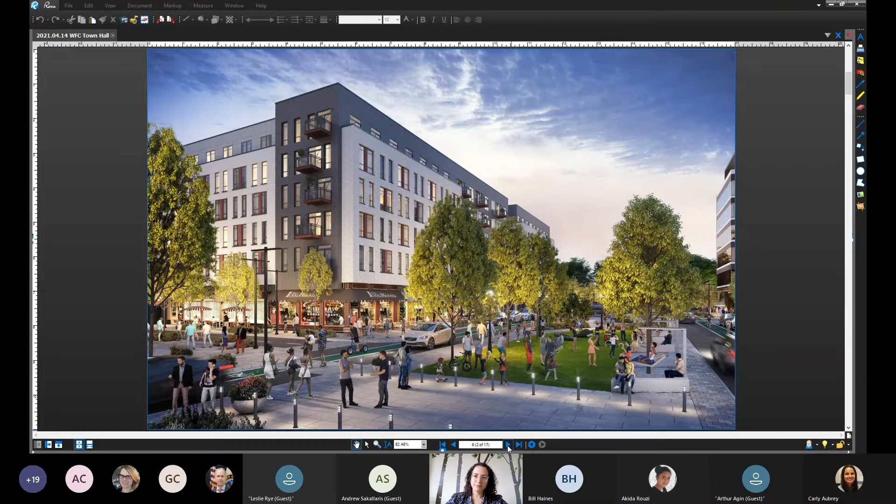Now we have turned around and the apartment is to our back, and now we're looking at the extended stay hotel next to the condo building, and then the school is behind what we're looking at right now. So again, you see that first floor retail activity is all the way around the commons.

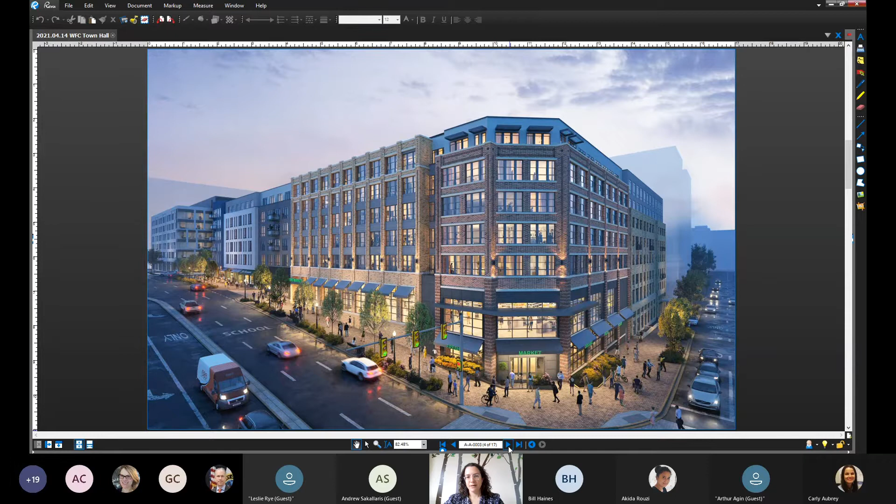And now we're standing, well, we're kind of standing high up in the air that you would never actually stand this high, but we are looking at Route 7 to our left and Haycock to our right, and we're looking at the main entry to the grocer, which is again at the first floor of the apartment building. And you can kind of see that the grocer is 2 floors at this point and kind of goes up to being 1 floor as you turn into the commons, and that's because of the 27-foot grade difference between the corner of Haycock and 7 and where the commons portion of the project starts.

So hopefully this gives a little bit of life to what we're talking about. Now back to a more technical drawing. One of the pieces that we have been working on is how to get people in and out of the commons. So right now we are looking at this stoplight is going to be added. We've been working with not only Falls Church, but Fairfax County, DOT, and VDOT to have a stoplight so that people can turn in and out of commons.

But then, as you can see here, commons is at the center. We're looking at Route 7, thinking about across the street where Chestnut Street goes through. There's a lot of concern from Fairfax County about calming traffic and not having Chestnut be a cut through. And then also we wanted to make sure that the owners on that side of the street also want to make sure that they have access to this stoplight, but we needed to kind of create a straight intersection instead of a very diagonal intersection. That wouldn't really work. So through a lot of different discussions, we came up with this plan where you're seeing these green portions added.

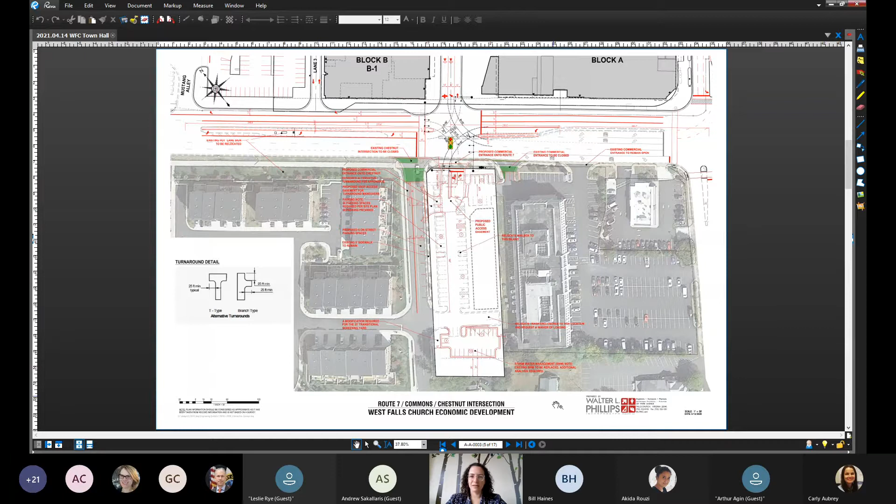So Chestnut will actually end. You won't drive through straight from Chestnut to 7 as you do now. We're creating a path through the parking lot where you turn and then turn up to be able to go to the stoplight, which will also calm traffic and probably limit the amount of people cutting through Chestnut because it's a little bit more complicated now, but also give both sides of Route 7 left-in, left-out access from a stoplight. So we're excited that we've been able to come up with this plan to make this additional ease of movement in the area.

Next page, please. So I put in this diagram because at a lot of these meetings, questions have come up about circulation on the site, and we can go into this in more detail when we get to the Q&A period.

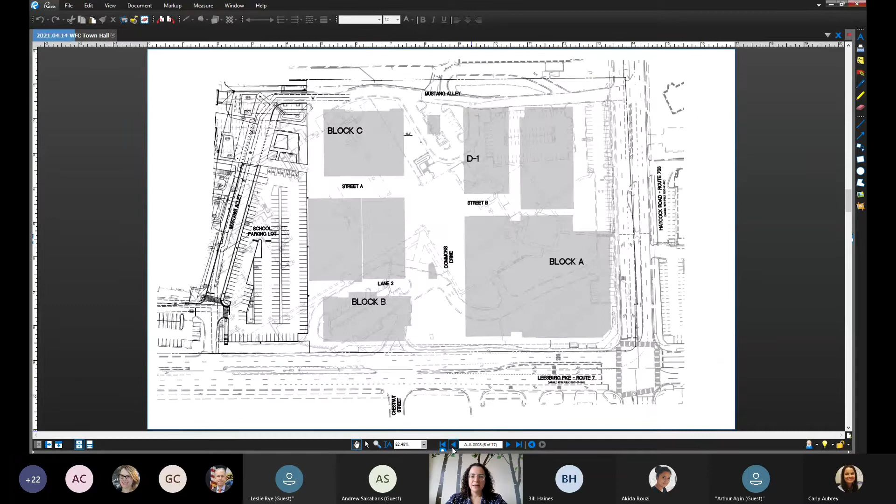So one of the questions that has come up - actually, sorry, can you go back one? Carly, thanks. So one of the questions that has come up is a lot of students are coming from the federal site or that part of the city and crossing over, and how they're going to get from one side of Haycock to the school on the other side. So we have created a stoplight where Carly has the little hand - we'll be putting a stoplight in that connects you to the street to come into the site. But then the question of that 27-foot grade exists here too, so we didn't want to have a really steep street that wasn't really accessible or comfortable to use.

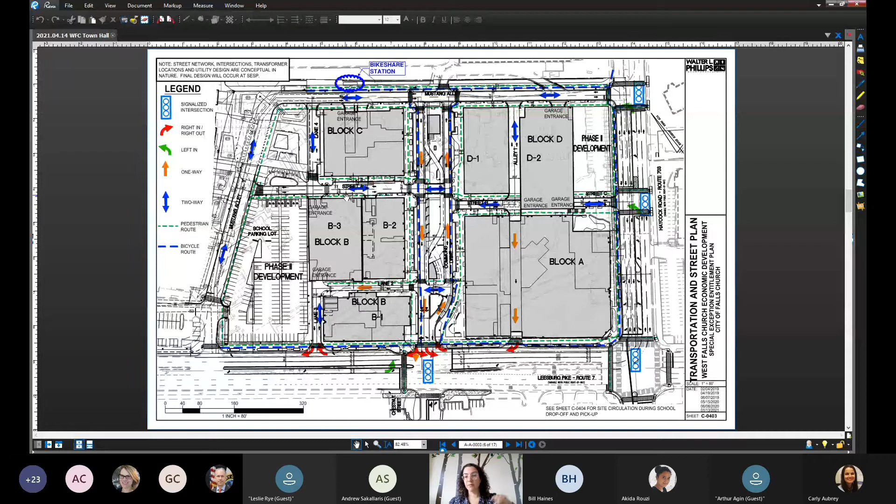So we actually have created a grand staircase with an elevator that we're going to show on the next page. It's really sweeping you in and getting you to come up, and then you get to the level of the commons and walk across and enter into the commons, and then you can keep going to the high school. So if you go to the next slide.

You come up the stairs, and at the same point basically where the stairs are, there's also going to be an elevator, because we want to make sure the experience is good no matter how you're getting upstairs - if you are in a wheelchair, if you have a stroller, if you have a bike that you don't want to bring up the stairs.

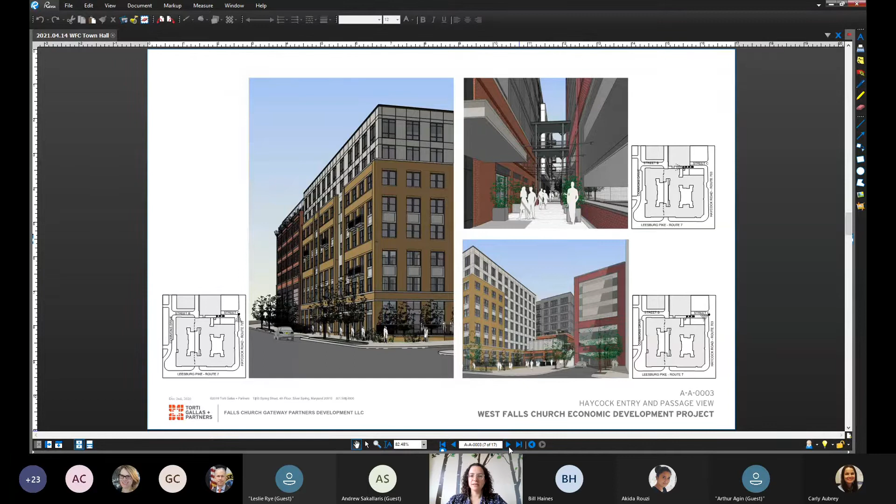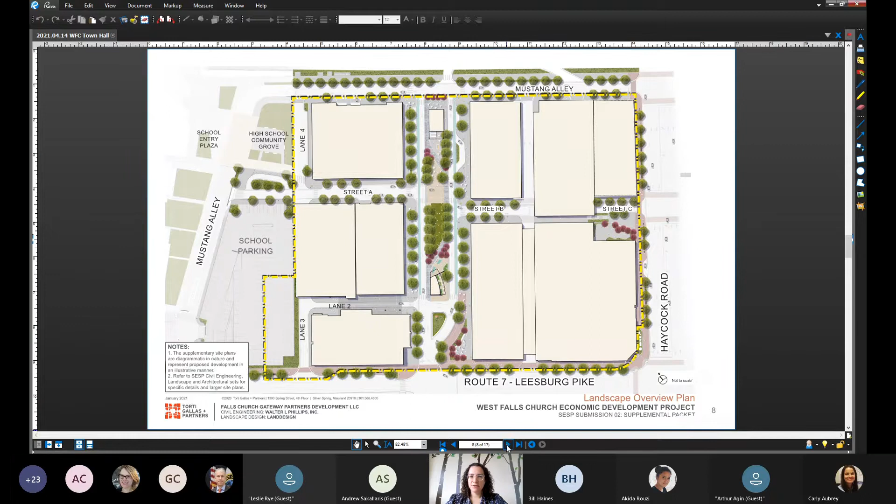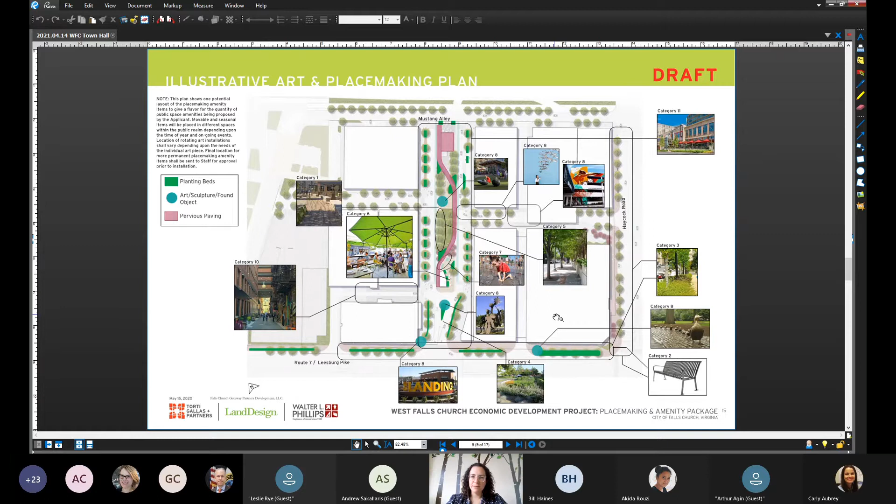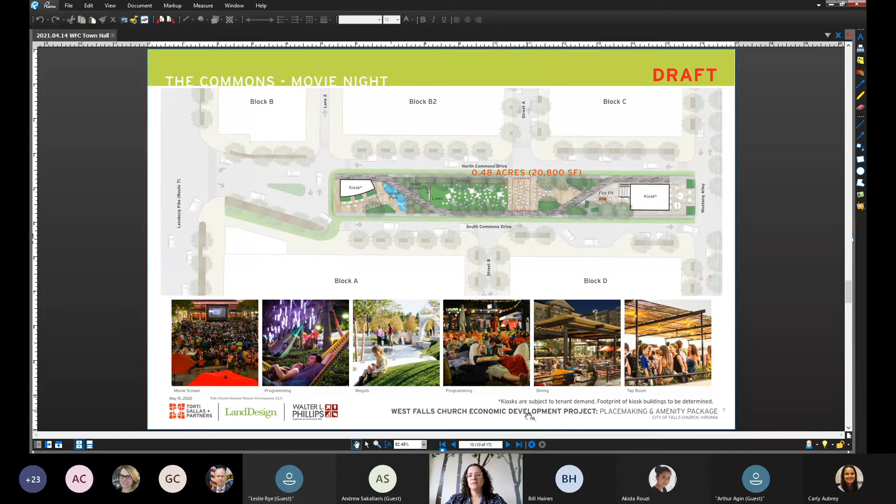Next page. And then, when I was talking about possibly closing down one or two of the center streets that surround the Commons to allow for larger events, we have a couple of examples here of something like a movie night, where you close down just that center part of the Commons, right under where it says acres. That street would get closed so that you have this one big Commons, with a splash pad, open lawn where you'd show a movie, fire pits, and different areas throughout the Commons that could come together as one. You're seeing examples of similar projects as precedents of what that would look and feel like.

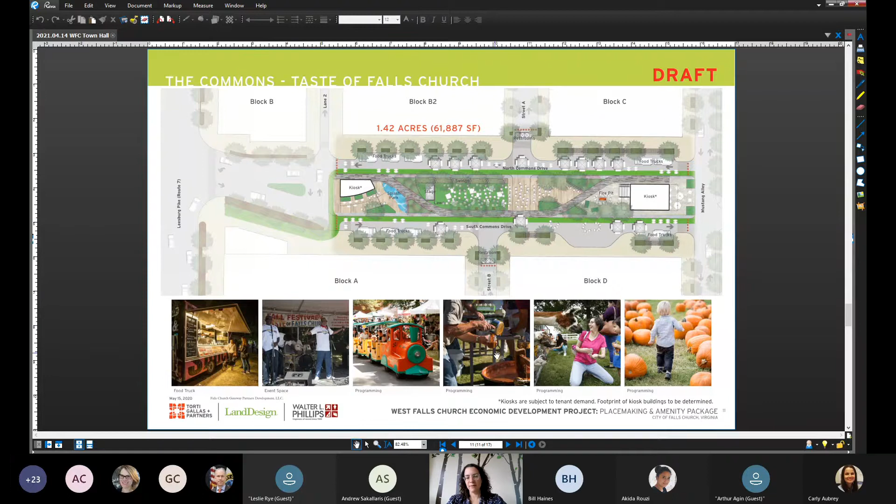Let's go to the next one. This is looking at if you closed the streets that run around the Commons to create this 1.42 acre open space. You could do something like a food truck festival, like Taste of Falls Church, with different food brought in, different places to sit — a really big opportunity to feel like you have this central park. Like the note says, it's more than 60,000 square feet of open space that's all pedestrian accessible. So we're excited about the Commons as an everyday use, but also its flexibility in becoming larger for these special events. Next page.

So again, this is just pointing out some of the sustainable site elements that are going into our LEED for neighborhood design or neighborhood development gold level application, and that is making sure that we have these tree-lined streets. We can discuss tree canopy or any other questions with Gabby.

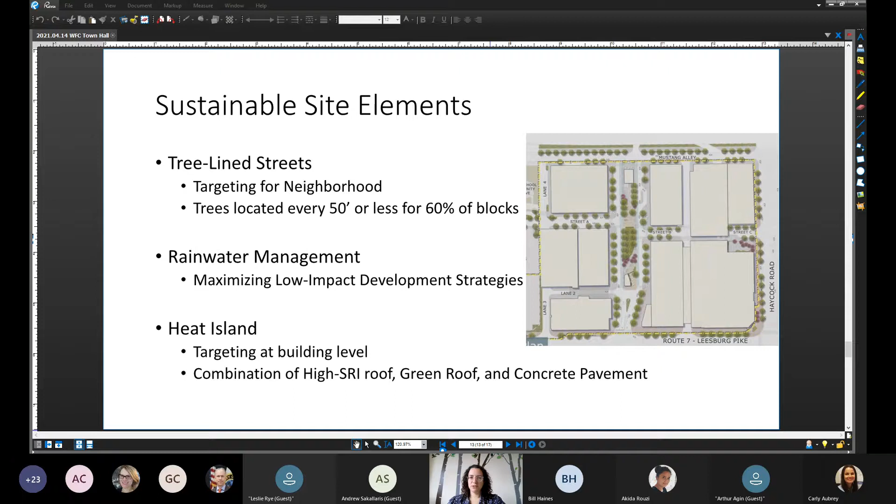Another question that has often come up is the amount of electric vehicle charging. This is an issue that's evolving on a daily basis as more and more cars are going electric. So we are providing 11 electric vehicle charging spaces in our garages.

We're planning to provide that at the opening, with 30 spaces having the infrastructure ready to become electric vehicle charging spaces, and then we're looking at additional mechanisms to increase capacity.

I think the great thing is that as electric cars become more ubiquitous, electric charging becomes a more worthwhile venture for the charging companies to get into, so they often end up sponsoring or paying for bringing their equipment to the site.

That's why we're going to create all the conduit and infrastructure to allow this to happen. Things could continue evolving extensively in the next few years, and I think we'll have the opportunity to continue to follow that while this development's being built.

Let's go to the next page.

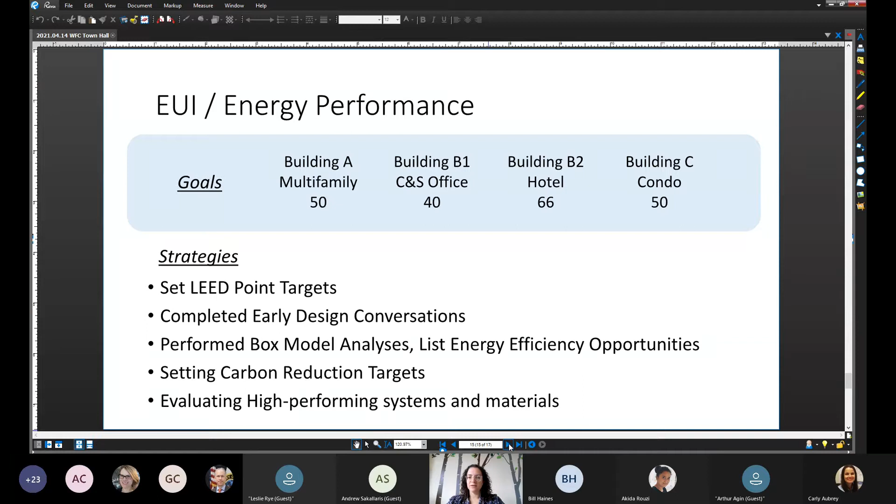There were some questions. Carly, I think we can hold on this one unless anybody has any specific questions. This is about the energy performance specific targets, and this relates to some of the questions that have come up from the boards and commissions, but we can come back if anybody wants to discuss it further. It's just how we've gotten to the energy targets that we are at.

Let's go to the next slide, which is the last two, which are about the net annual fiscal impact of the project. So I don't know if we want to talk about questions on the first 15 slides before you do this part, Carly, or if you want to hop right into the fiscal impact.

Yeah, let's go ahead and open it up to questions on what we've seen so far. Let me... I haven't seen any yet. Oh, I'm seeing one hand. Okay, yes.

Yes, go ahead, Amy. Hi, yes. Thank you for this presentation, Laura. Could you explain to us again what pet amenities are going to be on the site?

So actually, great that we have Gabby here, who can discuss that in more detail. But Carly, can you go back to maybe page 10 or the page with the full site, where you can see the tree plantings and all of that? That's probably the best. Or even here is fine too.

This is fine. Hi, Laura, and hi, everybody. Good afternoon. This is Gabriela Canemar-Clark. I'm a landscape architect for the project and happy to be here.

The dog areas, let me clarify, are more like pet relief areas for the support of the dog owners of the new neighborhood that we're creating. They're conveniently located on the streetscape near the lobby entrances throughout the project. For example, on Block C, the northwest block, there is a pet relief area, which I can describe as a designated space between the tree planters that has adequate floor treatment and a dog waste disposal and cleanup station associated with it.

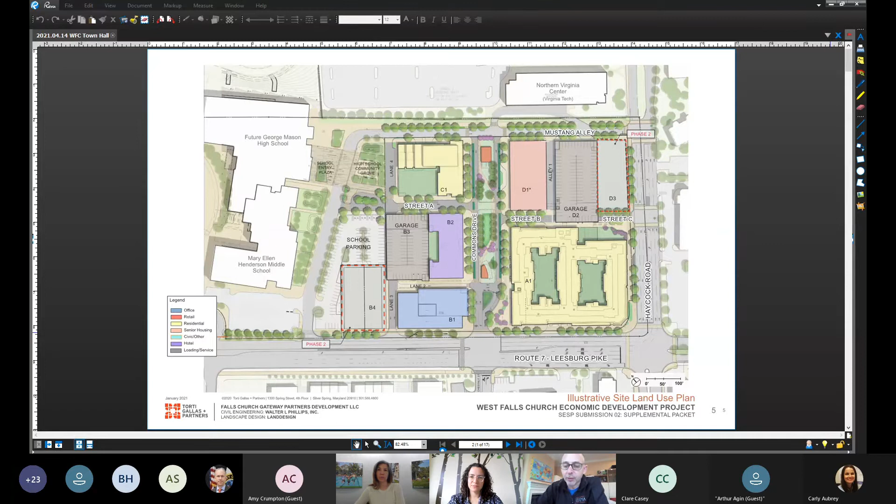Yes, so I think we have Evan Goldman on this call. Evan, I'm going to reach out to you for a second to talk about the amount of charging stations and how we came to that number, if you're available. Yeah, I'm happy to. Hi everybody, nice to see everybody again. So the charging stations were kind of a proffer that we negotiated the numbers of, that we'd be providing as part of our VCs. We've been having this conversation a little bit at the Planning Commission, at the council.

The best practice these days with chargers, given how quickly the technology is adapting and getting so widespread, is to be more flexible and not prescribe where you're going to install them. For example, Pike and Rose, a big mixed-use project I worked on in Rockville and North Bethesda.

When we started that project back in 2014, we included a certain number of EV charge spaces. As the building got occupied and we knew which specific office tenants and apartment renters wanted spaces and chargers, it was easy to lay the cabling to provide those spaces in the future. EV charge companies will often pay for that infrastructure and then get paid by the person using the charger on a monthly basis, as a way to recoup the money they spent on infrastructure.

There's very good market efficiency right now in this regard. To the extent we have people in our project buying or leasing electric cars, we'll have the ability to retrofit the garages with that. There will be a certain number to start, and we'll have a fast charger for people who just want to fill up like they're at a gas station. There's every intent to make that available to people.

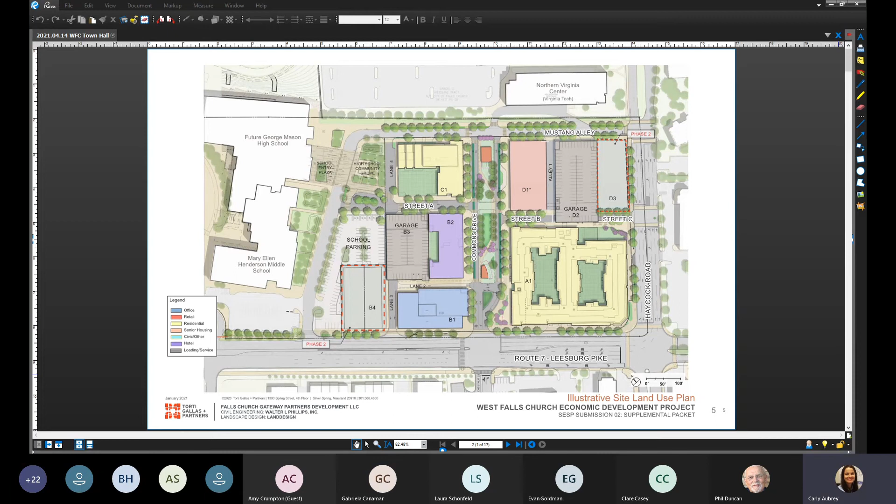And this is where the second special exception application materials are, from this second submission. So for the architecture sheets, it'll be these links right here, and I'll try pulling it up. It can be slow, but let's see what happens. It does include the elevations that have been shown at council meetings, as well as cross sections and floor plans.

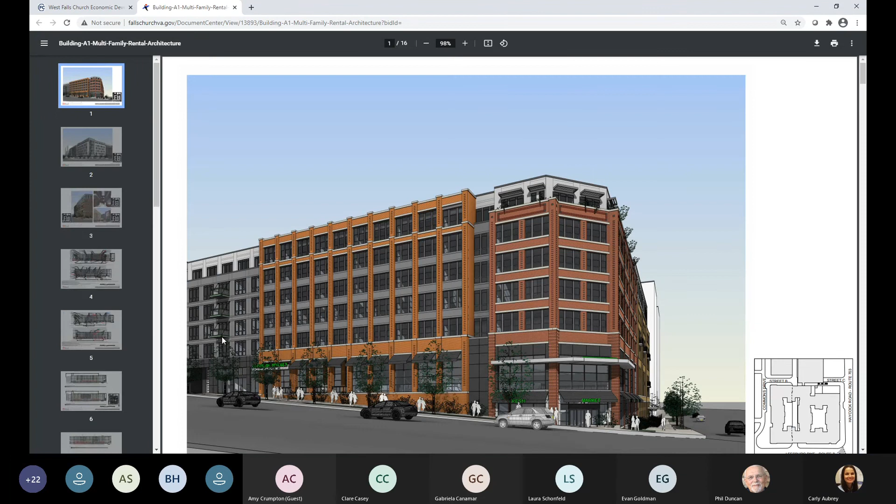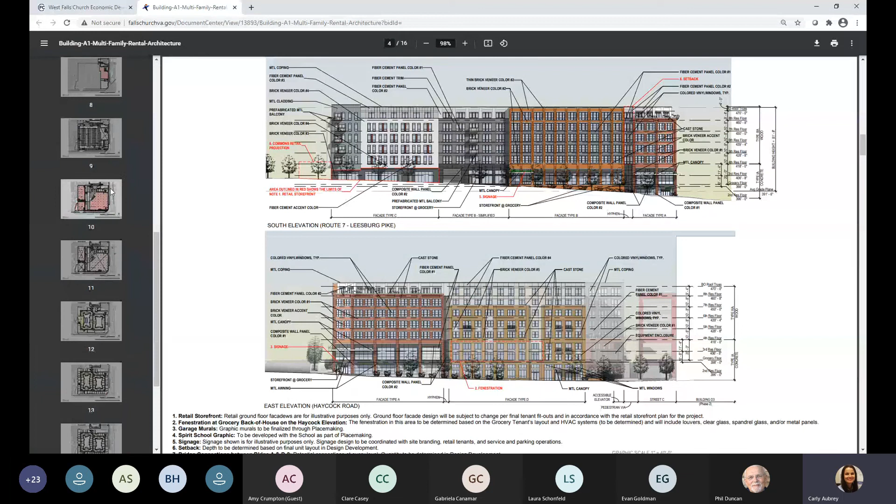So this is what, the elevations we're used to seeing. It does include these sheets, which talk about the actual materials that will be used. And then it gets into the floor plans for each level, and that's the same for each building.

So Carly, maybe do we want to link to the presentation that we gave on March 1st to the council? That's probably in here too, because that shows clarity on the major differences between the first and second submission of the SESP, so you can see clearly where we've responded to the comments. Yeah, let me better understand that.

I think with that, let me get back to... Another question: is the pool a private amenity? Right, so the pool we'll be having is within the apartment building, and that is for the apartment residents. So yes, it's a private amenity.